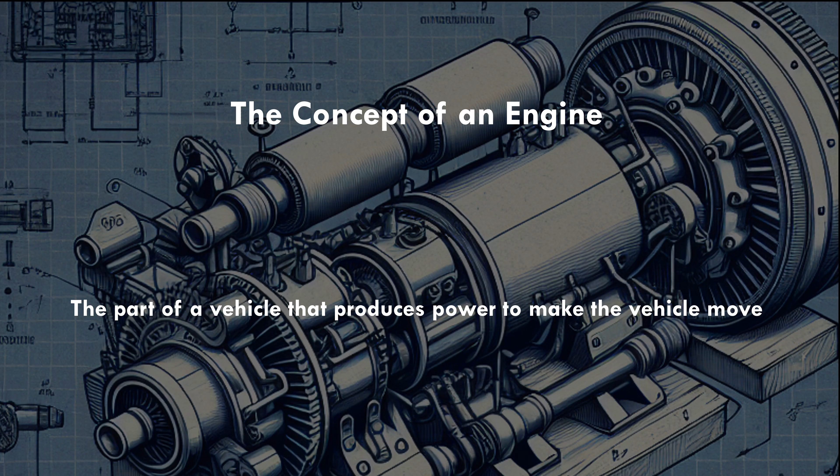But first, what exactly is an engine? By definition, an engine is a device that produces power which helps the vehicle move. Now, let's rewind and look at the fascinating history of how engines came to be.

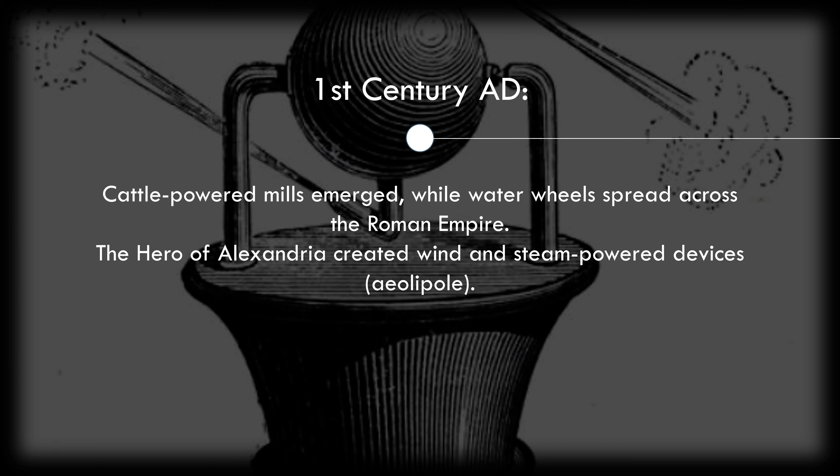Ancient machines utilized human, animal, water, wind, and steam power. Capstans and treadmills were common in ancient Greece and Rome. By the 1st century AD, cattle powered mills and water wheels spread across the Roman Empire. The hero of Alexandria invented wind and steam powered devices, often for religious purposes.

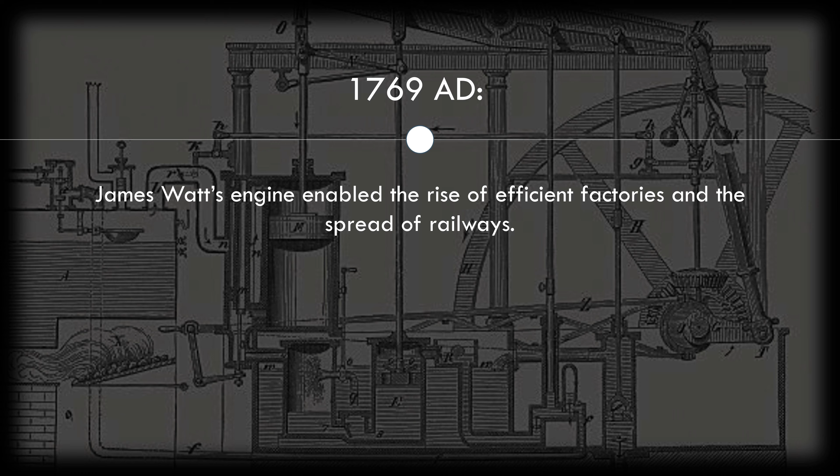The Industrial Revolution transformed engines with James Watt's steam engine in the late 1700s, enabling factories and railways. Internal combustion engines emerged in France, refined by inventors like Barsanti and Lenoir. In 1876, the Otto cycle introduced a compact, powerful engine design, revolutionizing transportation.

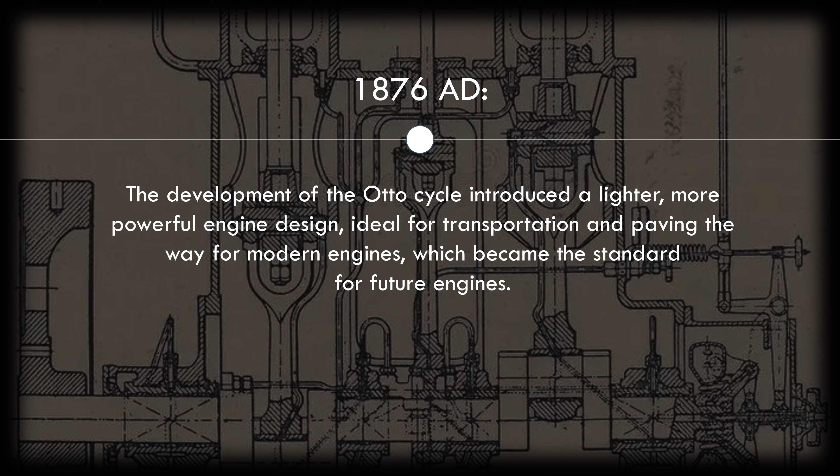Carl Benz's Patent-Motorwagen popularized four-stroke Otto-cycle gasoline engines. Diesel engines, known for efficiency, became common in heavy vehicles. Benz's 1896 Boxer engine saw use in cars and aircraft, marking the era when engines powered everything from ships to planes.

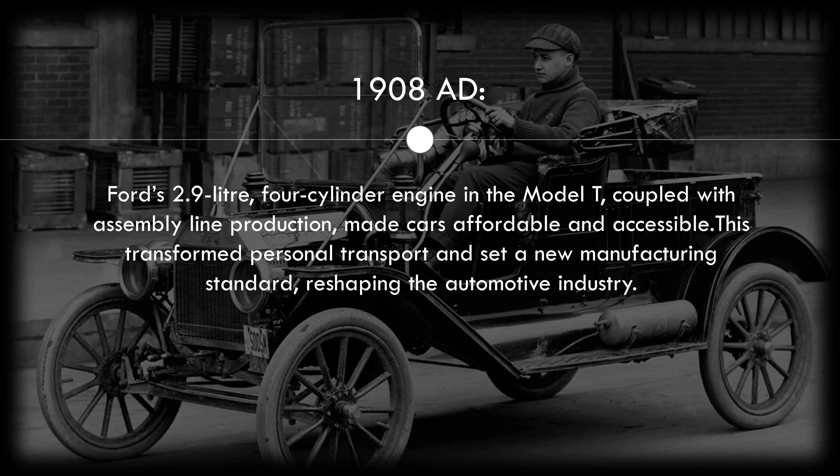Ford's Model T featured a 2.9-liter four-cylinder engine, making cars affordable and accessible. Ford's assembly line transformed manufacturing, setting a standard that revolutionized the automotive industry.

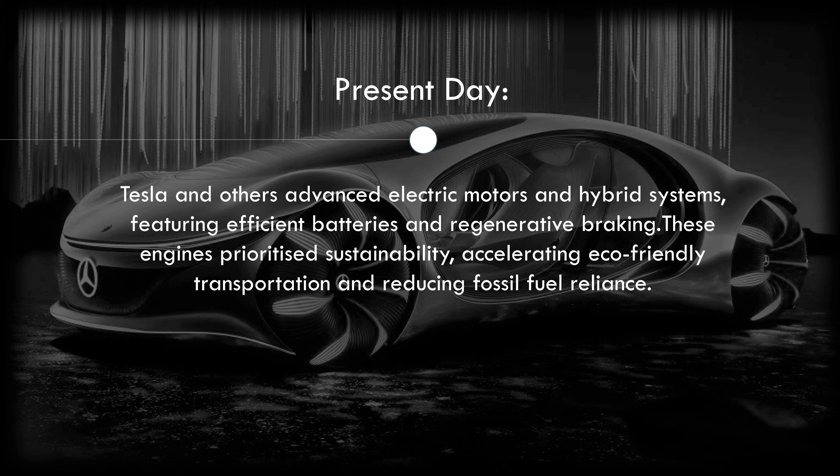The 2010s saw Tesla and others lead into electric and hybrid engines, combining efficient batteries, high torque, and regenerative braking. These innovations focus on sustainability, reducing reliance on fossil fuels, and driving eco-friendly transport.

The first law of thermodynamics focuses on the conservation of energy, explaining how an engine converts chemical energy into mechanical energy. The second law of thermodynamics explains why some energy from combustion is lost as heat rather than being utilized completely. Newton's laws also explain the workings of an engine.

The first law explains the continuous motion of the piston and the crankshaft. The second law explains how combustion generates force to move the pistons, while the third law shows that combustion pushes the piston down, while the crankshaft provides a counterweight, thus pushing it back up.

Boyle's law explains that as cylinder volume decreases during compression, the pressure and the temperature increase, and after ignition, this high pressure expansion drives the piston, converting fuel energy into mechanical energy.

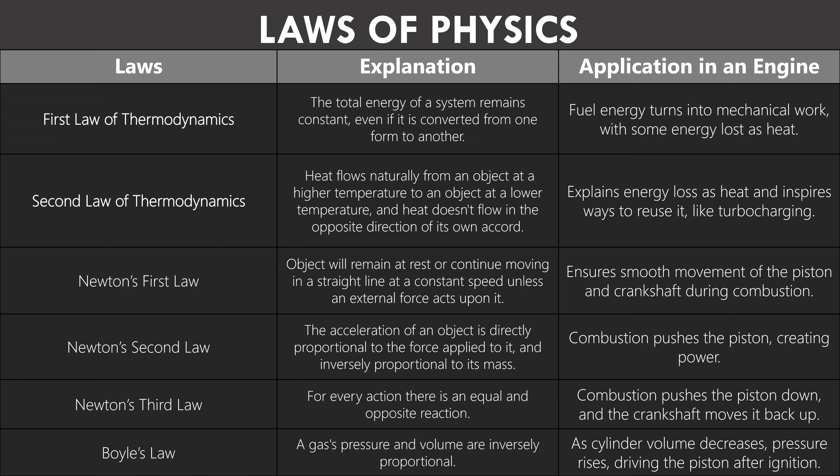Now let's understand the first two laws of thermodynamics in more depth. The first law of thermodynamics is central to engines and is expressed as delta Q equals delta U plus W. Delta Q is the heat energy added, which represents the fuel combustion. Delta U represents the internal energy changes, that are the changes in pressure and the temperature of the gases.

W is the work output, which in engines is mechanical energy to power. This equation explains how fuel's chemical energy converts into mechanical energy, driving engine operation. It balances heat input, internal energy changes, and the work output, forming the foundation of the internal combustion engine design and thermodynamic cycles like the Otto cycle for efficiency and performance.

The second law of thermodynamics is fundamental to understanding engine efficiency and is expressed as delta S is greater than or equal to Q divided by T. Here, delta S represents the change in entropy, which is a measurement of energy dispersion. Q is the heat energy transfer and T is the absolute temperature at which this heat transfer occurs.

This law highlights that energy transformations are never 100% efficient and some energy is always lost as heat, increasing entropy in the system. This principle explains why chemical energy is never fully converted into mechanical energy. Innovations like turbochargers try to minimize this heat loss.

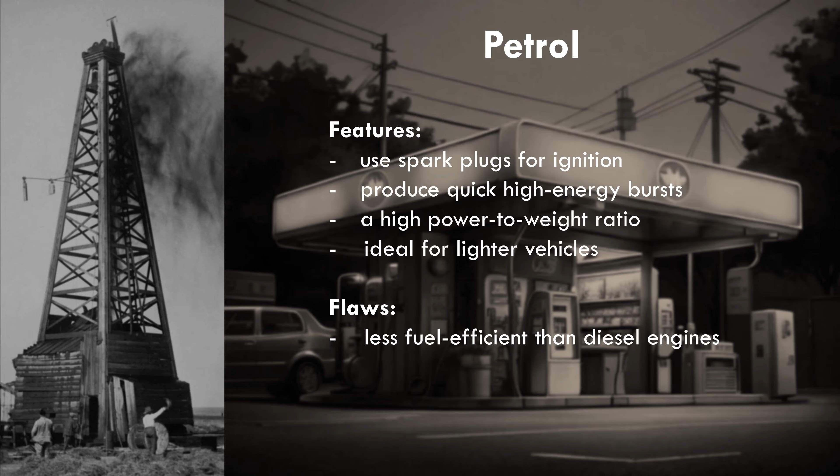Diesel engines rely on high compression for ignition, achieving 20 to 25% more fuel efficiency than petrol. Diesel's denser energy content provides higher mileage, making it popular for trucks and heavy duty vehicles, though they are often prone to overheating.

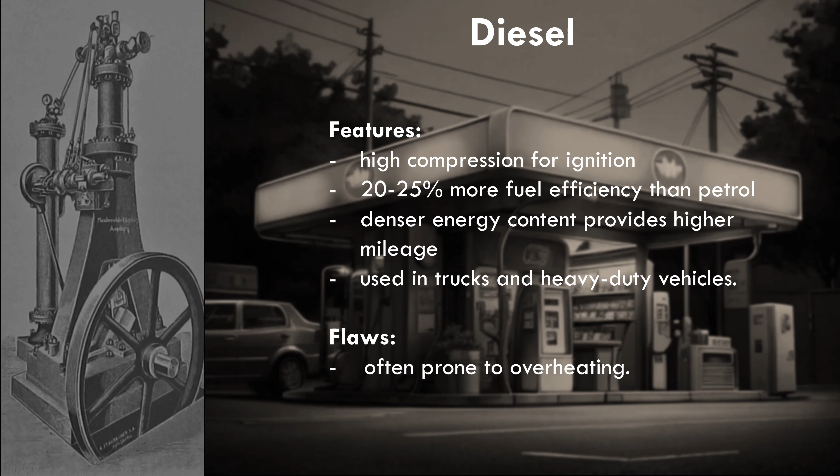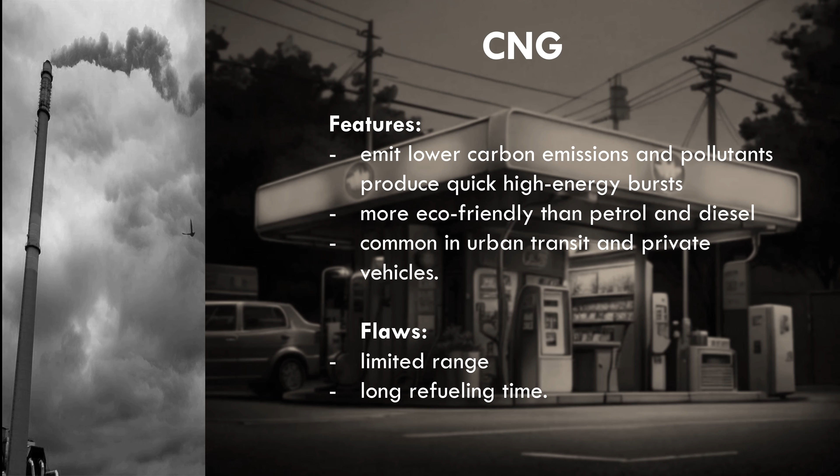Compressed natural gas emits lower carbon emissions and pollutants, making them more eco friendly than petrol and diesel. While CNG has lower energy density, its environmental benefits make it popular in urban transits and private vehicles. However, they have a limited range and long refueling time.

Today we will be exploring the two types of combustion engines, internal and external. Internal combustion engines generate power by igniting fuel in a confined space, creating expanding hot gases that drive pistons or turbine blades. This process, fueled by air, converts chemical energy into mechanical work to power vehicles.

External combustion engines generate power by burning fuel outside the engine to produce steam or heated gases. This energy drives pistons or turbines, converting thermal energy into mechanical work for applications like locomotives and power plants.

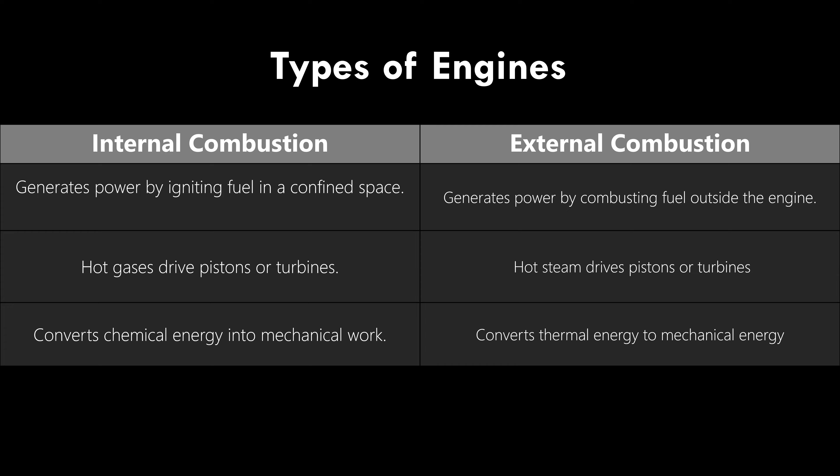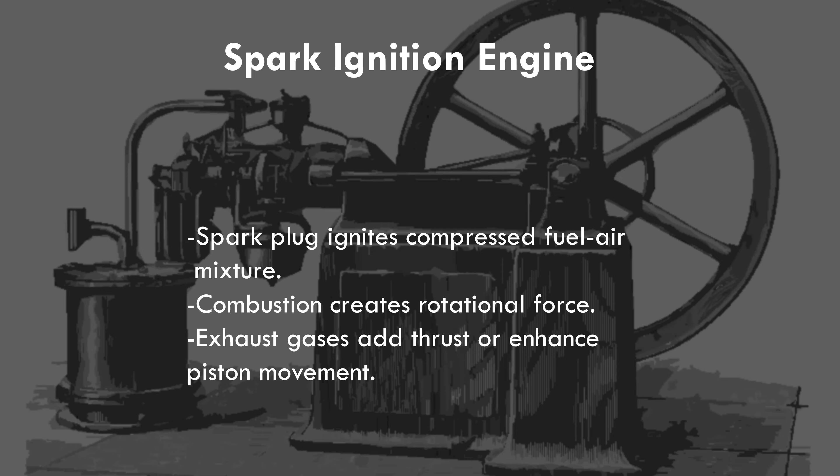Spark ignition engines, a type of internal combustion engine, use a spark plug to ignite a compressed air fuel mixture. The resulting explosion creates a rotational force that drives the engine's components, with exhaust gases adding thrust in jet engines or enhancing piston movement in reciprocating engines.

Compression ignition engines ignite fuel through high pressure air compression rather than a spark plug. Compressed air is heated and fuel injected into this air spontaneously ignites. The combustion drives the piston and generates additional thrust in diesel engines, which are more fuel efficient and commonly used in diesel vehicles and heavy machinery.

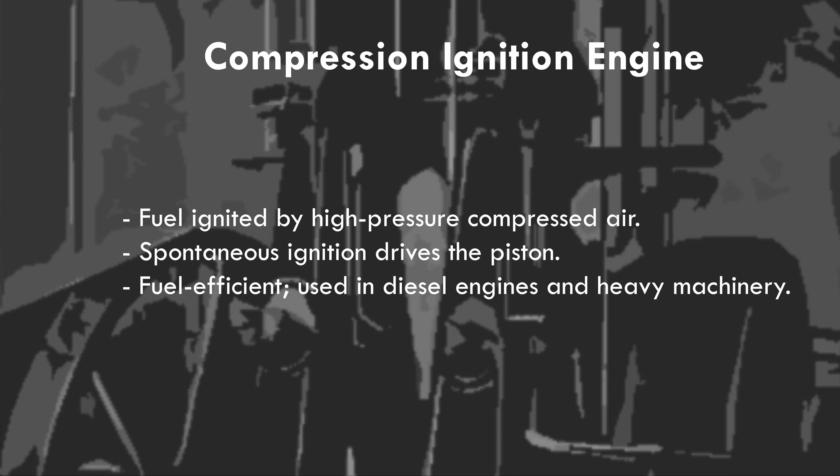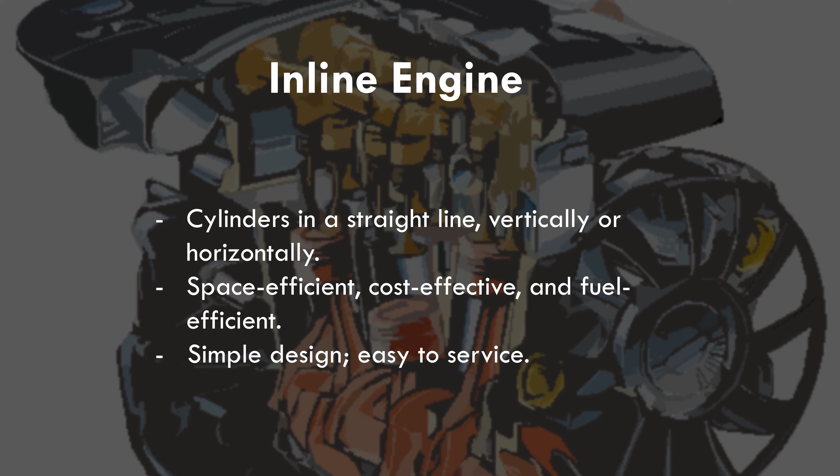Another important aspect of an engine is its layout, referring to the arrangement of cylinders. In an inline engine, the cylinders are arranged in a straight line, vertically or horizontally, for space efficiency. Commonly found in compact cars and motorcycles, the design is simple, cost effective, and fuel efficient with reduced friction. Its straight layout makes parts more accessible for easier servicing.

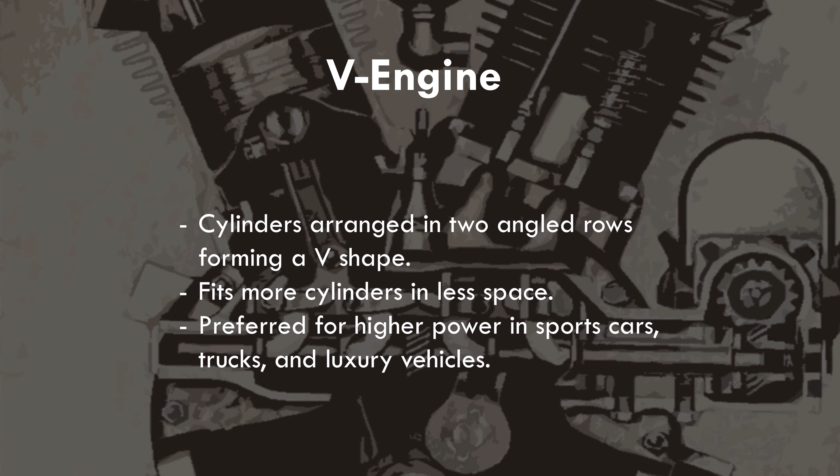A V-shaped engine arranges cylinders in two angled rows, usually at 60 or 90 degrees, forming a V shape, allowing for more cylinders in less space. This engine type is preferred in sports cars, trucks, and luxury vehicles for its compact design and higher power output.

In a flat or boxer engine, the cylinders lie flat and face opposite each other, distributing mass evenly and creating a low center of gravity. Used in select sports cars, this engine enhances stability and handling while reducing vibrations due to opposing cylinder design.

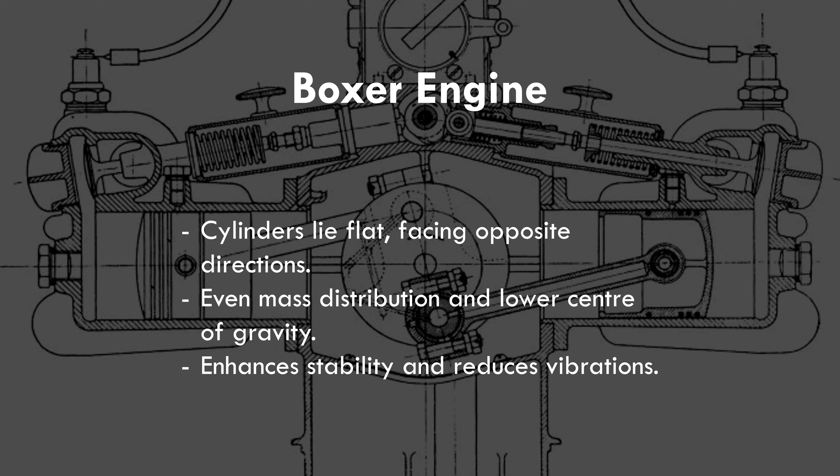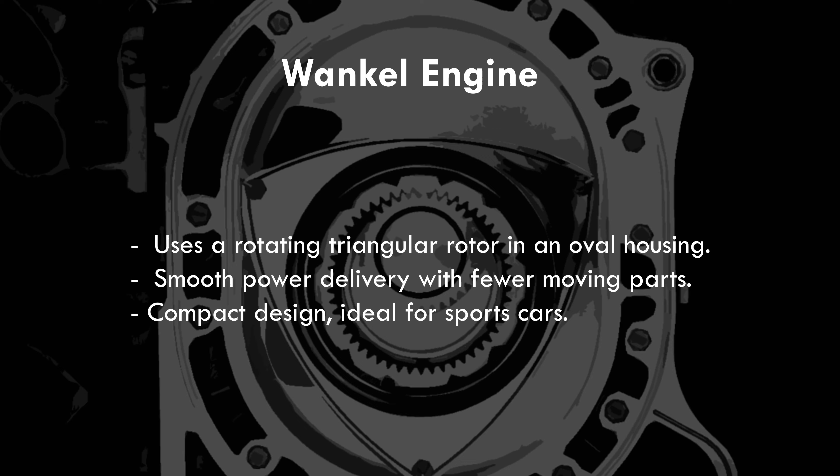Unlike traditional piston engines, the rotary or Wankel engine uses a rotating triangular rotor within an oval housing for power. Known for its smooth power delivery and fewer moving parts, this compact engine is ideal for sports cars.

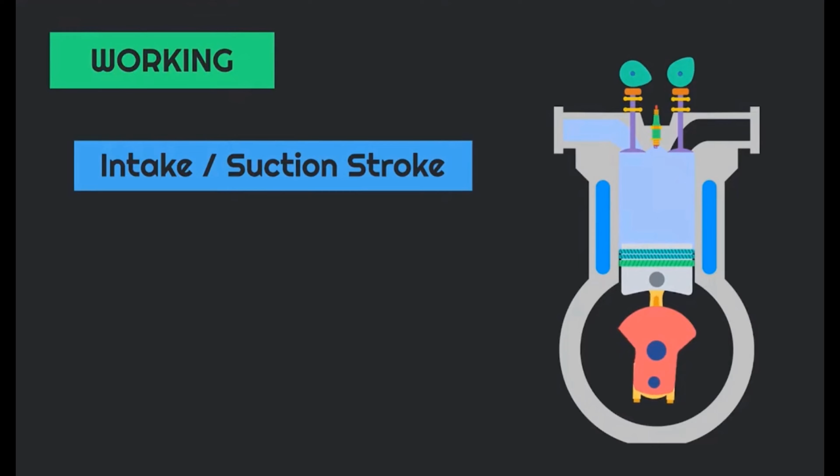The four-stroke cycle, which you may remember as the Otto cycle, is essentially how an engine generates power. It explains the steps in a piston's operation. The first stage is intake: as the intake valve opens, the piston moves down, drawing an air-fuel mixture into the cylinder. This creates a charge for combustion and fills the cylinder to prepare for the next stage.

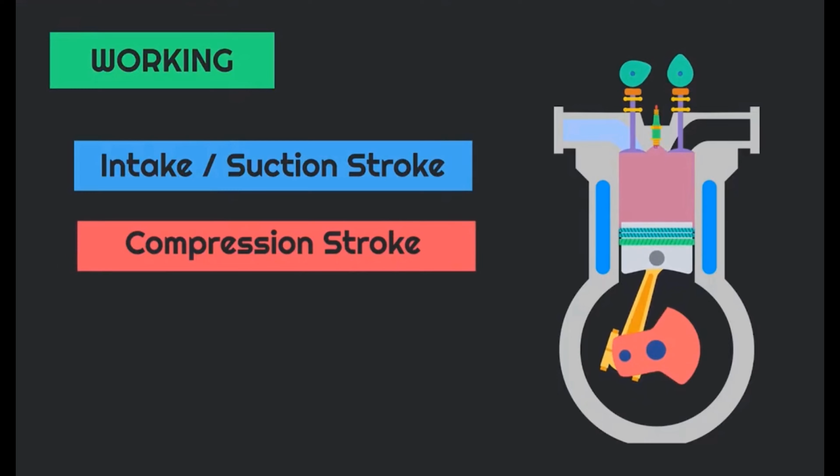The second stage is compression. The intake valve closes and the piston moves upward, compressing the air-fuel mixture tightly. This compression increases the mixture's potential energy, making it more explosive.

The third stage is power. A spark ignites the whole compressed air-fuel mixture, causing a combustion that forces the piston downward with power. This downstroke drives the crankshaft, converting chemical energy into mechanical work.

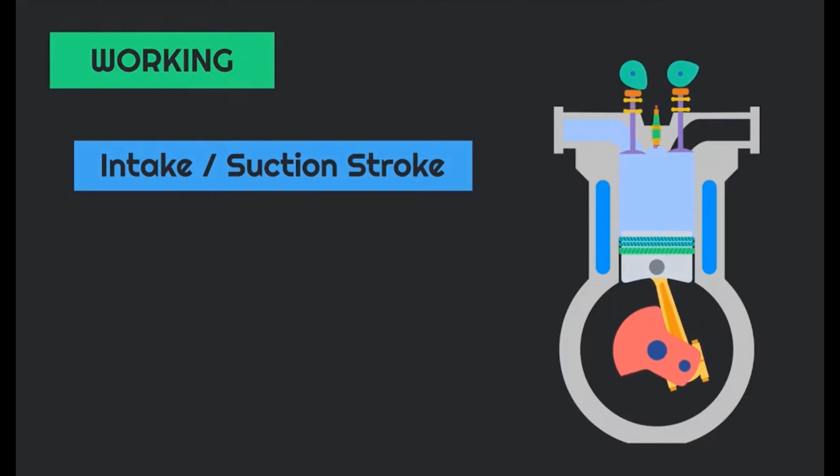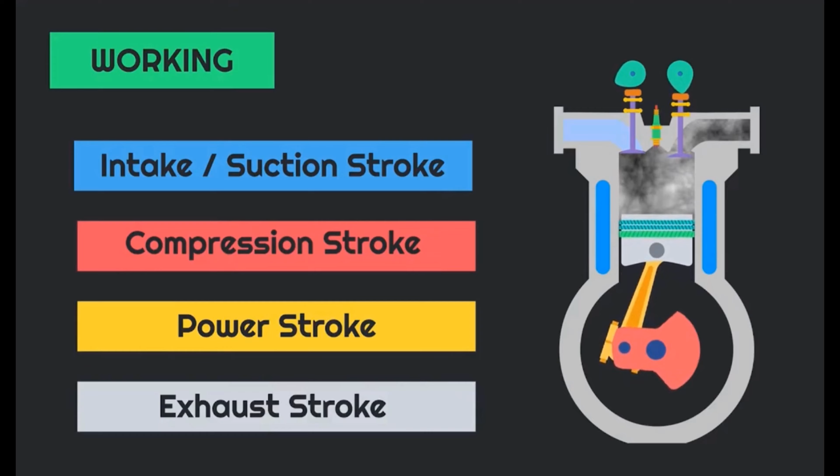The fourth and final stage is exhaust. The exhaust valve opens as the piston moves back up, pushing out the burnt gases from the cylinder. This expels the waste and prepares the cylinder for a fresh intake of the air-fuel mix, starting the next cycle.

Coming to the components of an engine, it begins with a reciprocating system which generates engine power. Pistons move up and down in the cylinders, driven by combustion, converting fuel energy into motion.

Connecting rods link pistons to the crankshaft. The rotating assembly drives engine movement. The crankshaft converts the pistons' up and down motion into rotational force, which powers the wheels. The flywheel adds momentum, making power delivery smooth.

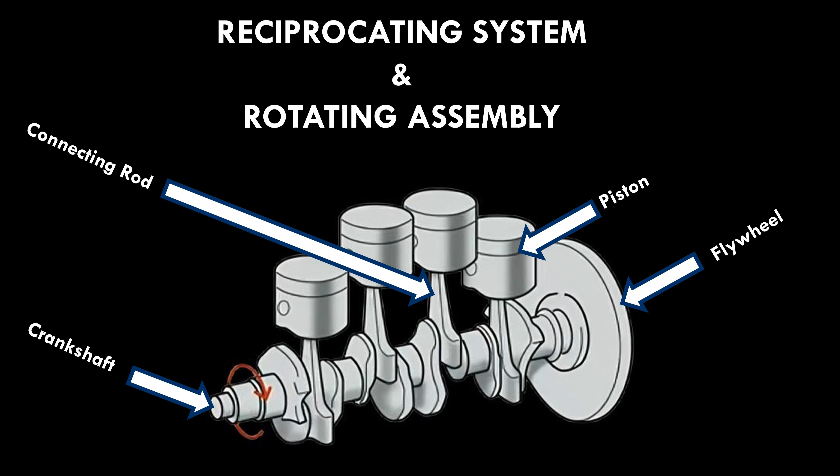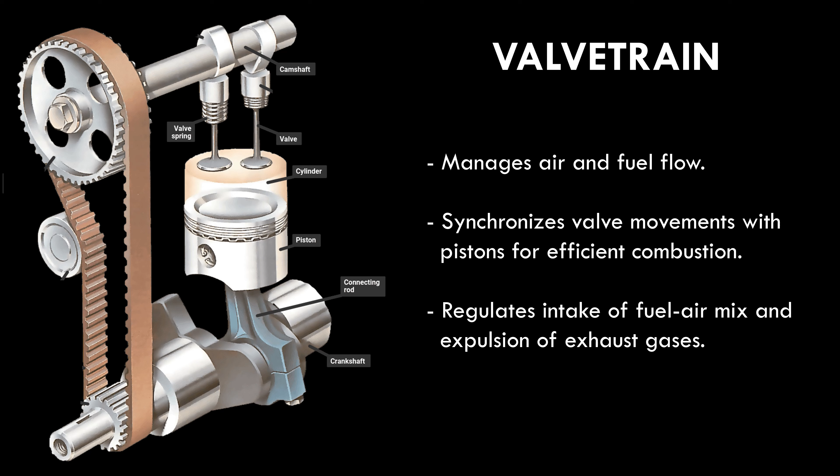The valve train manages air and fuel flow. The camshaft opens and closes the intake and exhaust valves in sync with the pistons for efficient combustion. Valves regulate airflow by allowing fresh fuel-air mix in and letting out exhaust gases.

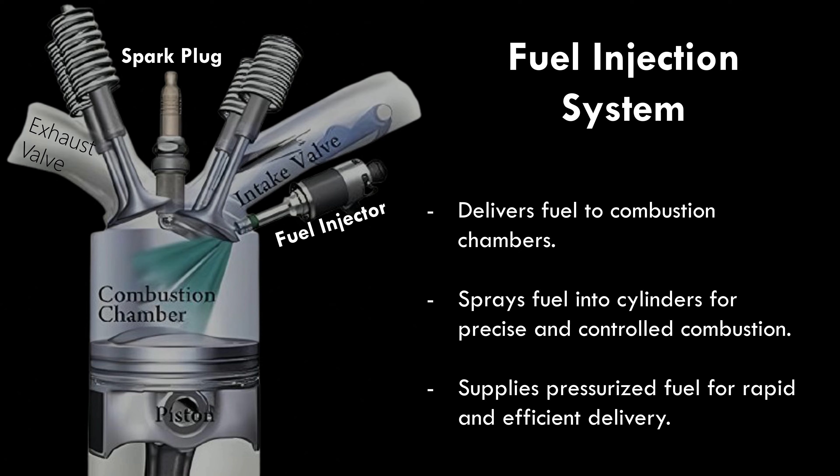The fuel injection system delivers fuel to the combustion chambers. Fuel injectors spray fuel into the cylinders for controlled combustion, with the fuel pump supplying pressurized fuel to the injectors for fast delivery.

Let's discuss the limitations of a combustion engine. First is inefficiency and heat loss. Combustion engines waste significant energy as heat, achieving limited thermal efficiency. You may be surprised, but petrol engines only have an efficiency of 25 to 30%, and diesel engines up to 40%.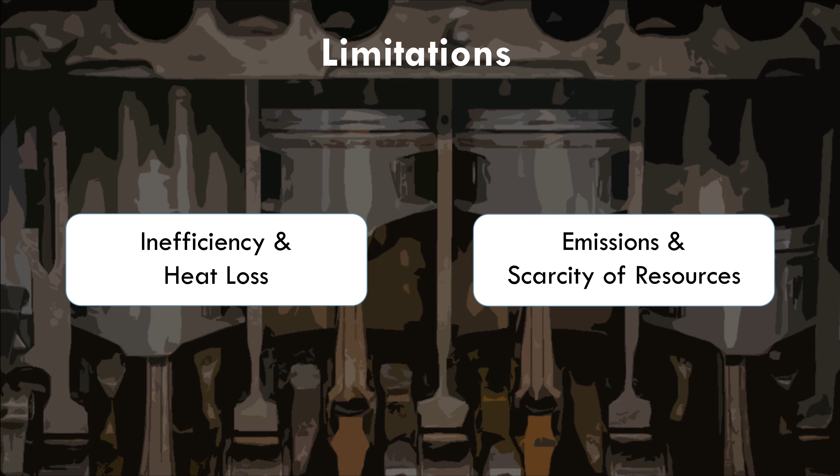Emissions and scarcity of resources are also great limitations. They emit harmful pollutants that destroy ecosystems and rely on finite fossil fuels, impacting sustainability. Often, high-performance engines are heavy and take up considerable space, giving them a limited power-to-weight ratio and making them unable to be used in compact or lightweight designs.

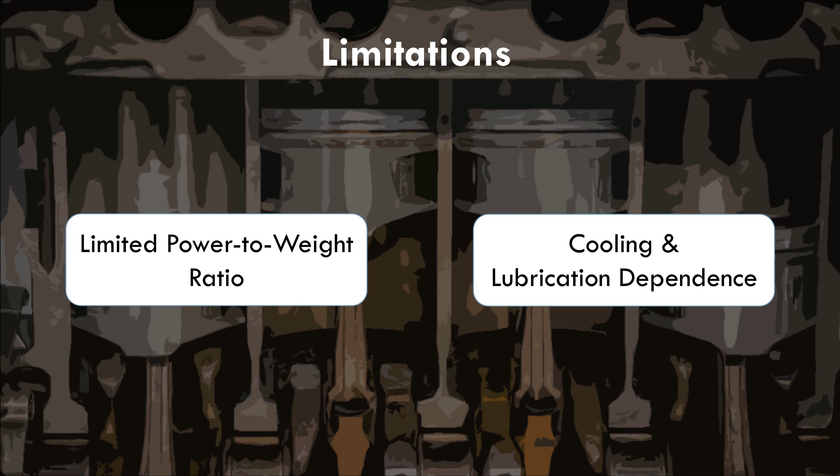As the world races behind more powerful and faster engines, the dependence on cooling and lubrication systems increases. Combustion engines require intricate systems to manage heat and friction, making larger engines significantly more complex and demanding higher maintenance.

However, there are systems to mitigate the effects of these limitations. One of them is the forced induction system. These are systems used to improve engine performance by compressing the air entering the combustion chamber, increasing air pressure, enabling the engine to burn more fuel and generate greater power without growing in size, boosting efficiency and performance.

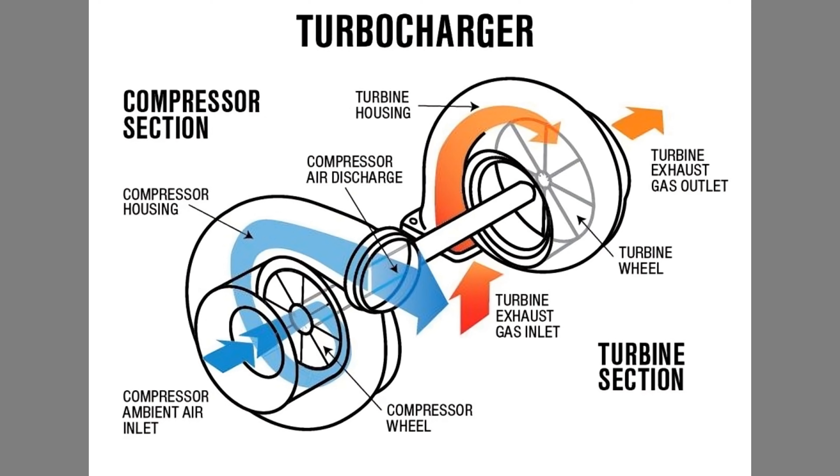Exhaust gases spin a turbine in the turbine section, which drives a connected compressor wheel in the compressor section. The compressor pulls in fresh air, compresses it, and sends it into the engine. This increases air density, improving combustion and engine power.

A screw supercharger operates using two meshing helical rotors to compress incoming air. As the rotors spin, they trap and compress air in the spaces between them, reducing its volume and increasing its pressure. This compressed air is then delivered directly to the engine, improving air density and enabling better combustion for greater engine power and efficiency.

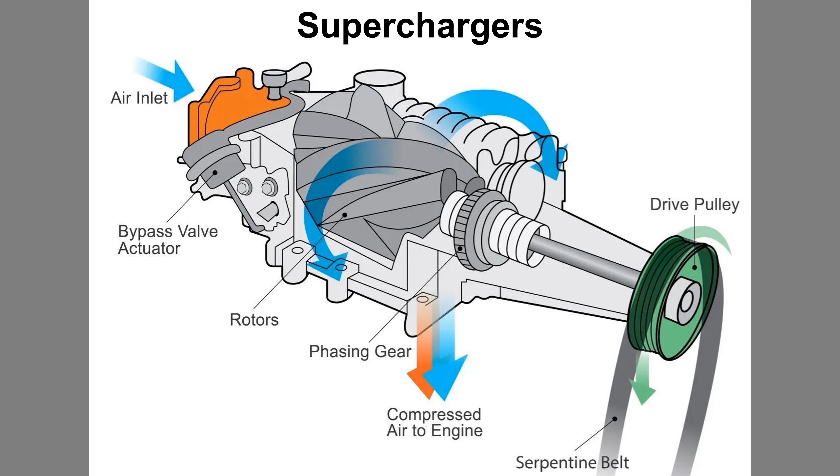This journey explored technology, physics, and the philosophies driving progress. We explored how curiosity, innovation, and responsibility drive advancements, balancing progress with sustainability.